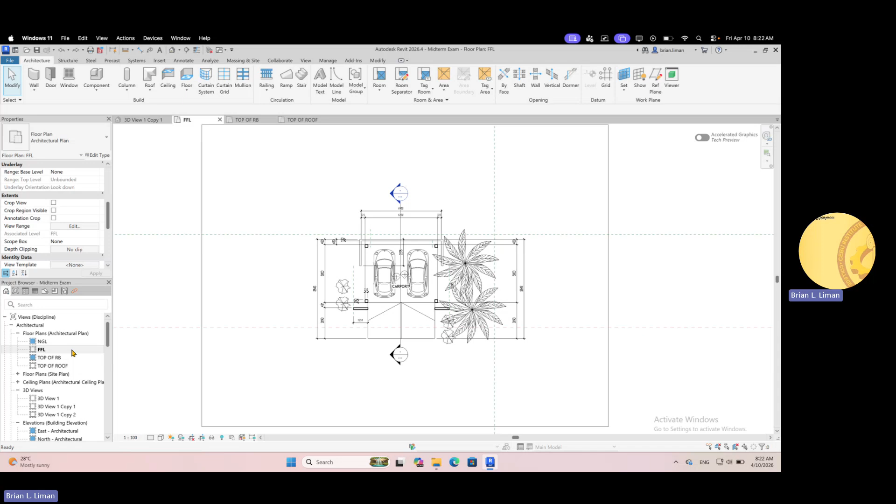This one class, you have to reflect the dimensions and label, of course, carport. Then this one class, as shown, you have an arrow reflected. That arrow is using detail lines, so you type DL to form this arrow. That signifies that the area is sloping, that surface.

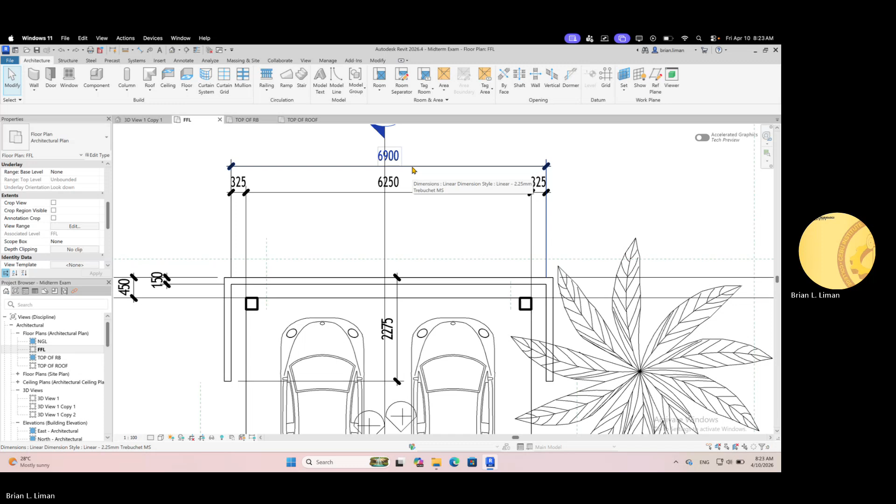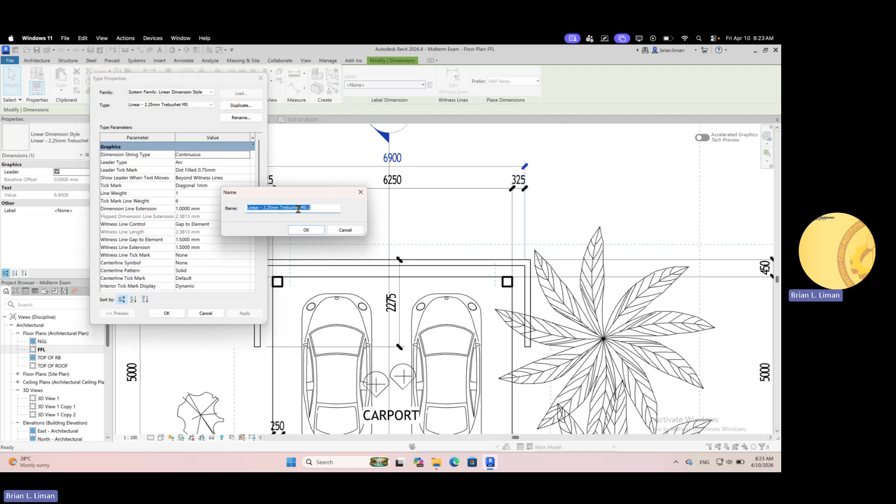As shown, the dimensions are in millimeters. If you want, you can set that to meters. For the dimensions, the reason is you have to make changes into the properties. You just click on the dimensions, edit type, then duplicate.

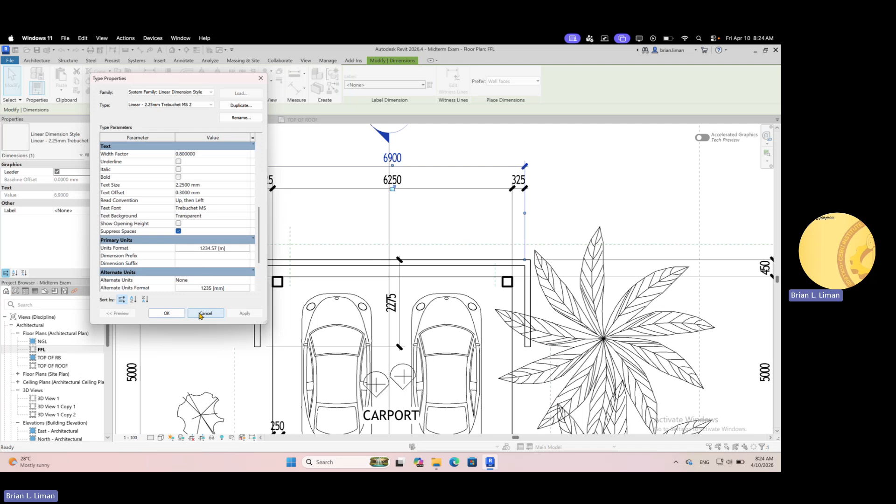Scroll below. Under primary units, go to units format, click on that, change to meters, set rounding to 2 decimal places, then okay, apply, then okay. As shown, this particular dimension is now in meters.

However, the others are still in the old unit. So what you do is click on the other dimensions, click on them, then go to type selector under properties, and set them to this one that was created in meters.

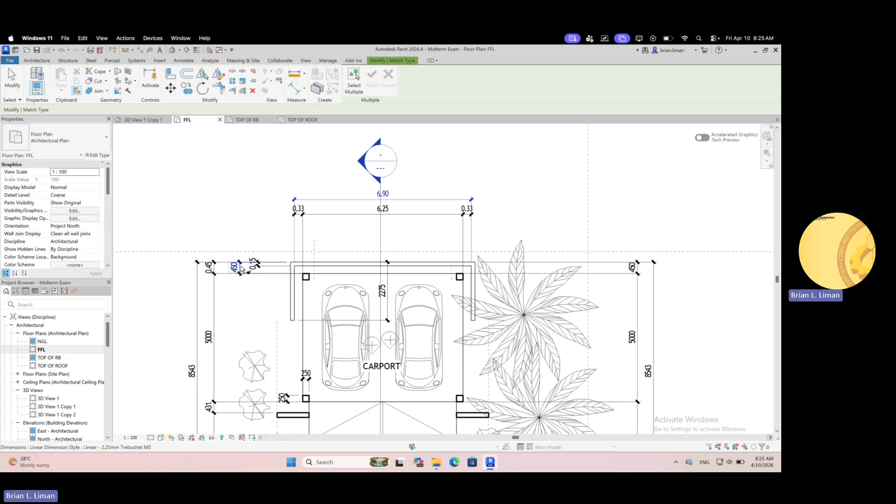Another method is MA, just like in AutoCAD MA, match properties. Click the source dimension, then click the destination dimensions. As shown, the one I clicked is now using meters.

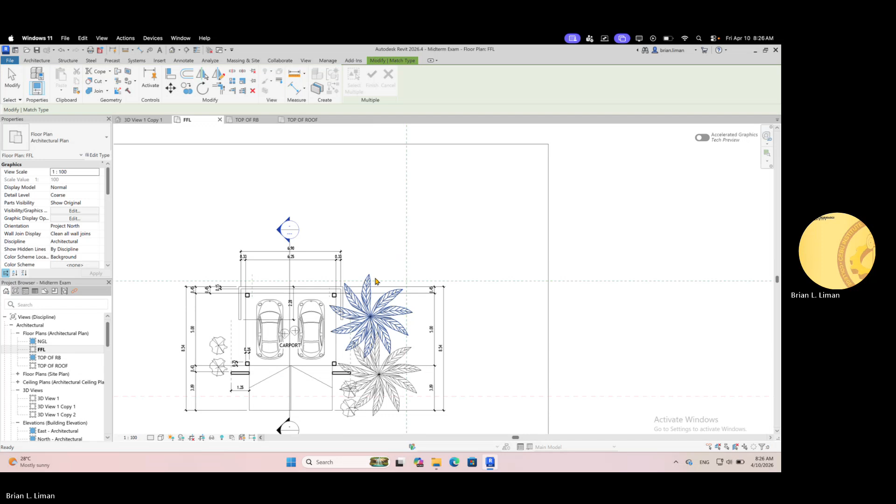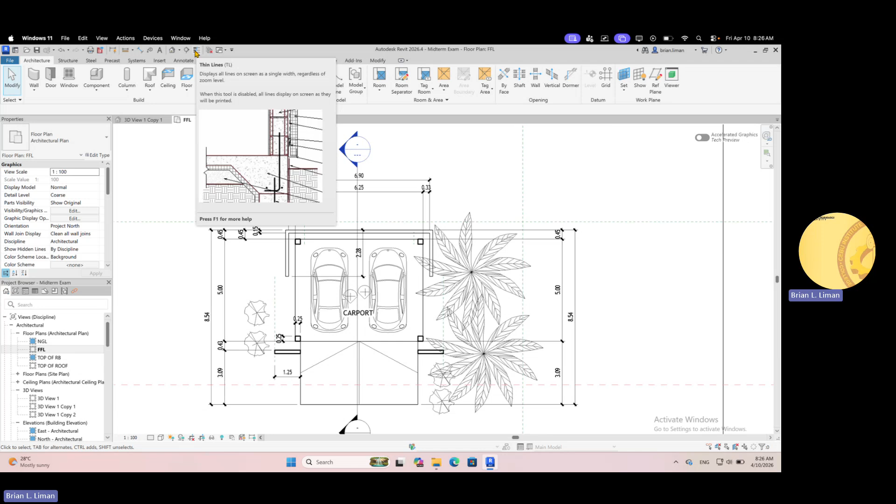Now, in terms of line weights, we can see some are thick and some are thin. If you want, while doing the model, everything to be thin lines, you go here, thin lines, you can also type TL. If we activate that, everything becomes thin. It will not apply thick lines. You have to click it again so that line weights will be applied.

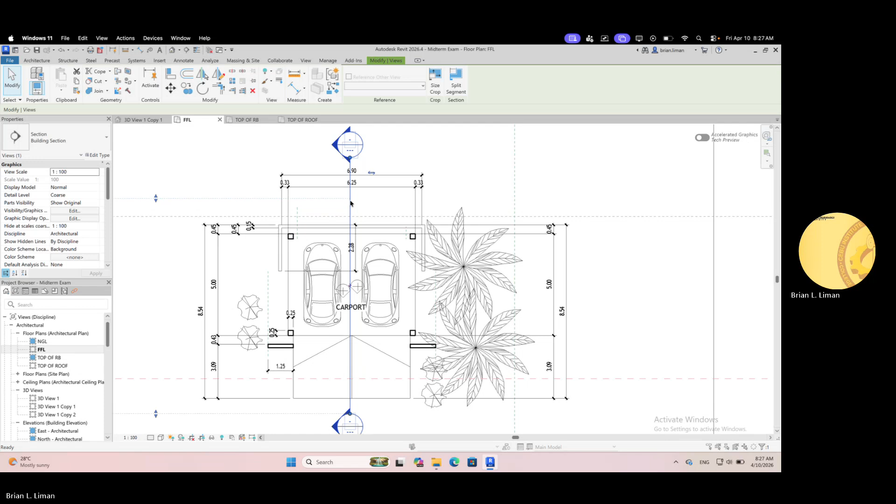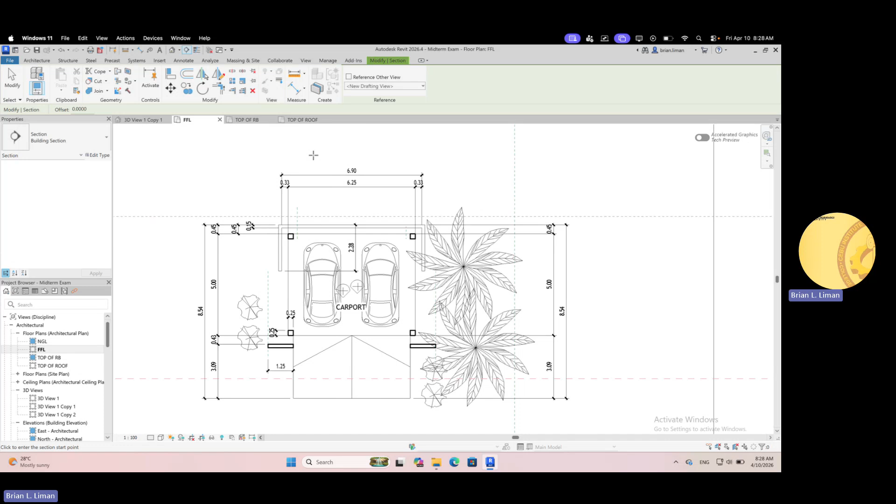Section - we already have a section placed. For the section, I'm going to delete this one. Section is here, this one. Upper part, you have section, you can also go to view, then here you have section. To be faster, just use this. Click section, go to your FFL, click section and the tool is activated.

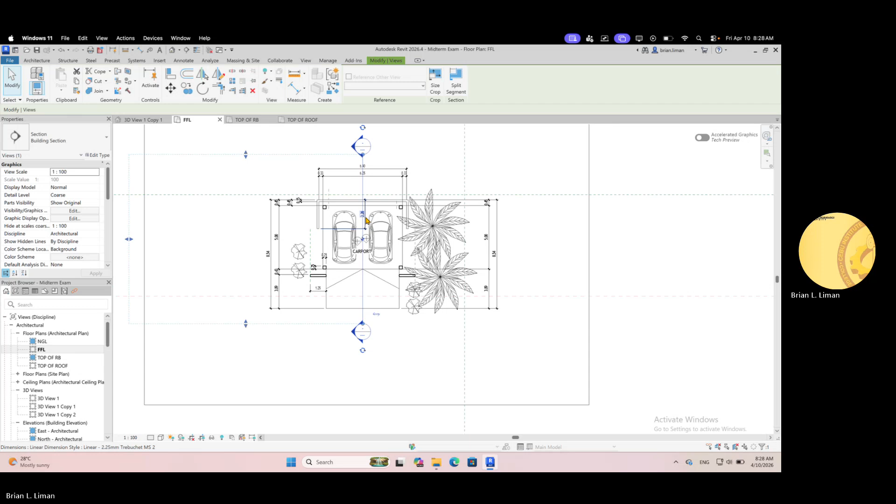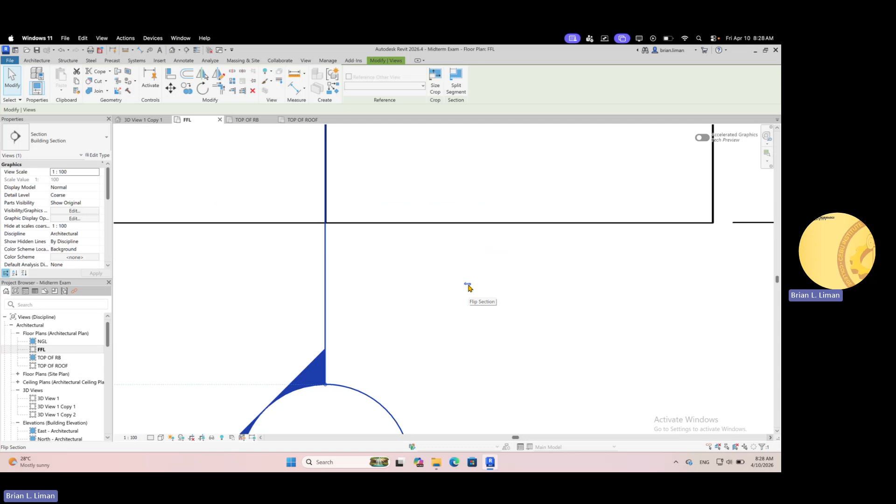Let's say you click here from bottom and hover upward, then also click for the other end. So that's the section being indicated. Now, the section, as you can see, has arrows here. If we click these arrows, it flips.

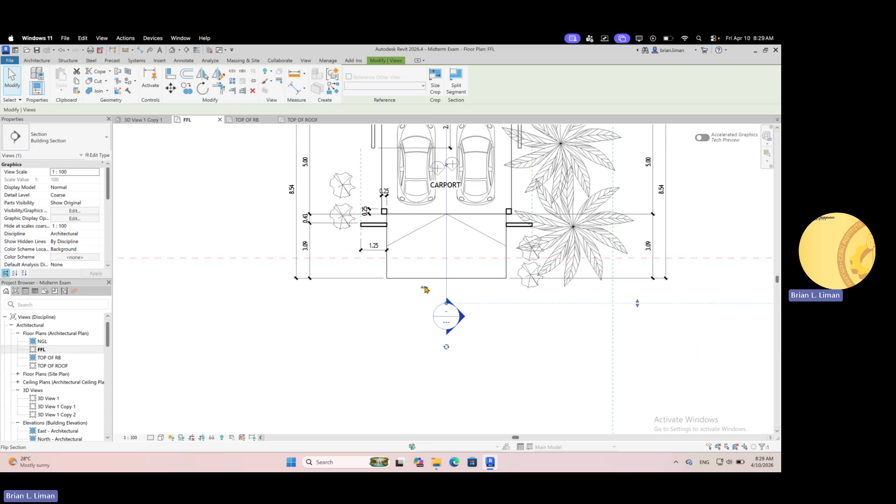That's the view, so it depends on us what to show. But this structure, there's no problem since it's the same either way, similar to flipping to the other side. Let's say we keep the arrow pointing this way, click that one again. So this means, when we cut this section, the view faces this direction. Another critical part of this section is this, which indicates its extent.

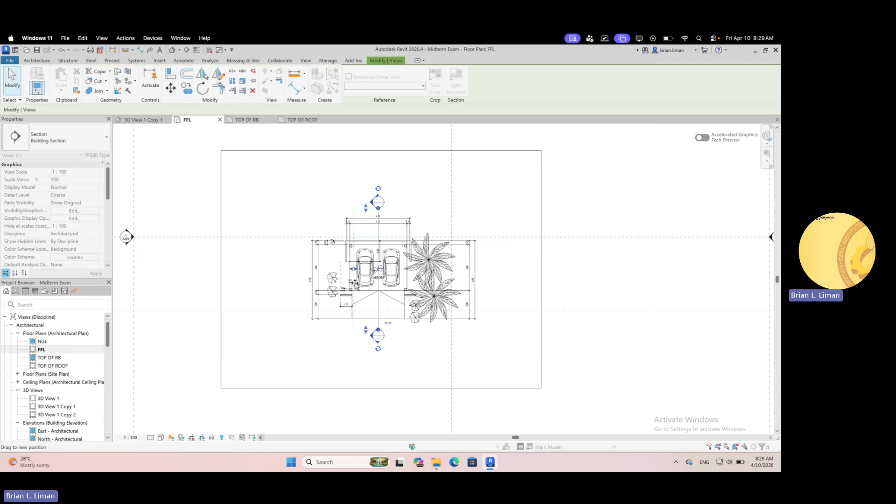This indicates its field of view, up to here. Let's say you move it, hold it, and place it here - that means its view is only up to here. It won't see the columns and this wall. That's why it's called the extension or extent of the site, so you can see through it if there are elements or structures you don't want to see in this particular section, you move it.

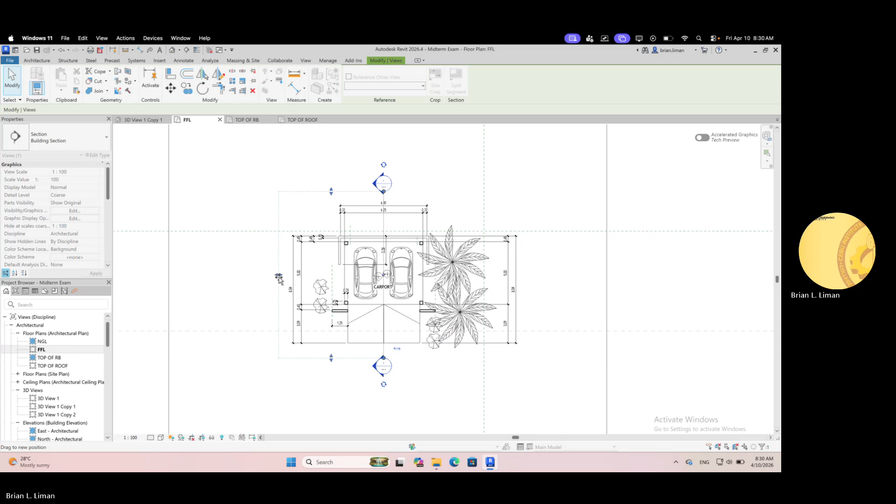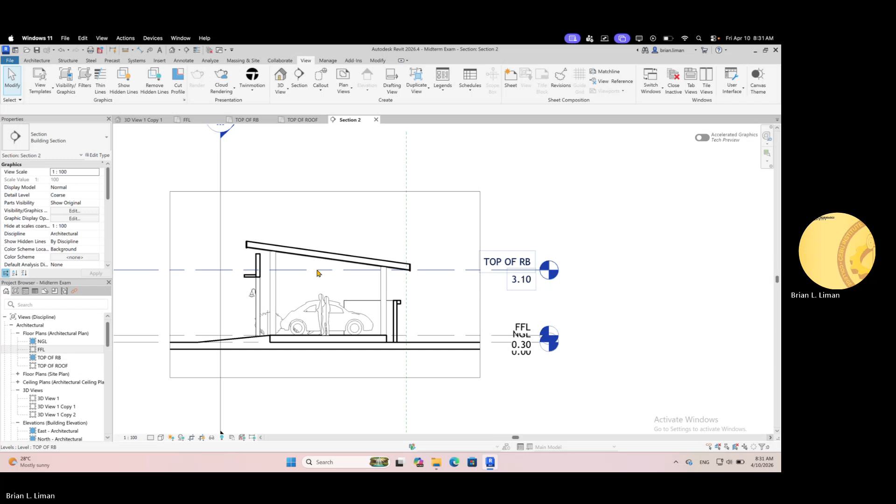So for the section, we click that section, right click, then go to view. Here, we can see its section view - this one. So you make the section and then go to this view of the section. It's the same with crop view, this one, you can control your crop view. Let's say you want to see this area, then hold on this point, and now only this part will be shown for our section view.

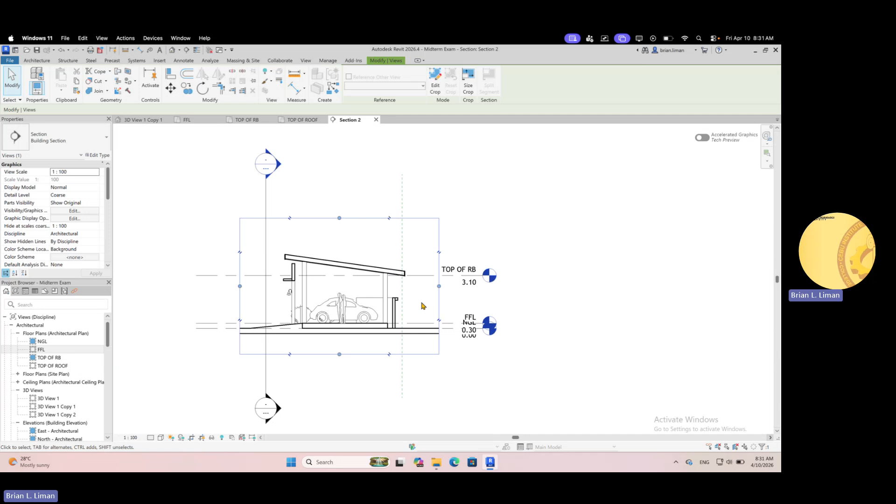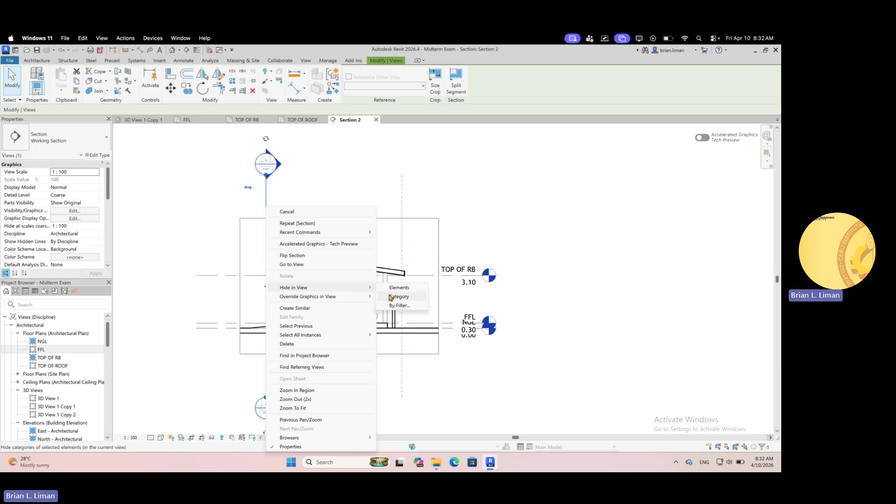Now, if this one appears, like the other items, section views you don't want shown, what you do is select it, right click, and hide in view elements. If there are multiple sections, you can use category so that all section annotations get hidden at once. But let's say elements only since there's just one, so hide it.

So we can see line weights are applied, thin. But in our section, we want to apply shading - example, the wall we make black, the roofing we make black, the flooring we make black. So what do we do for that?

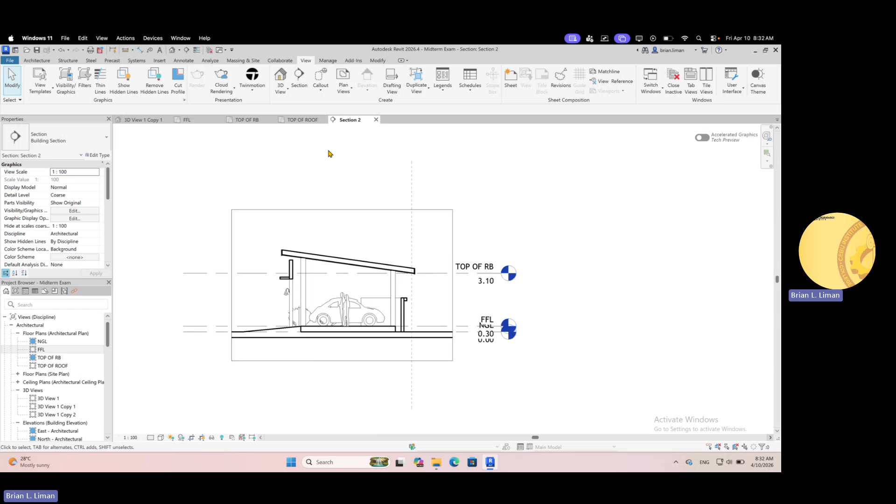You go to visibility graphics. Under view, you have visibility graphics, or just type VG. You can use VG or view, then visibility graphics. So what we'll do, class?

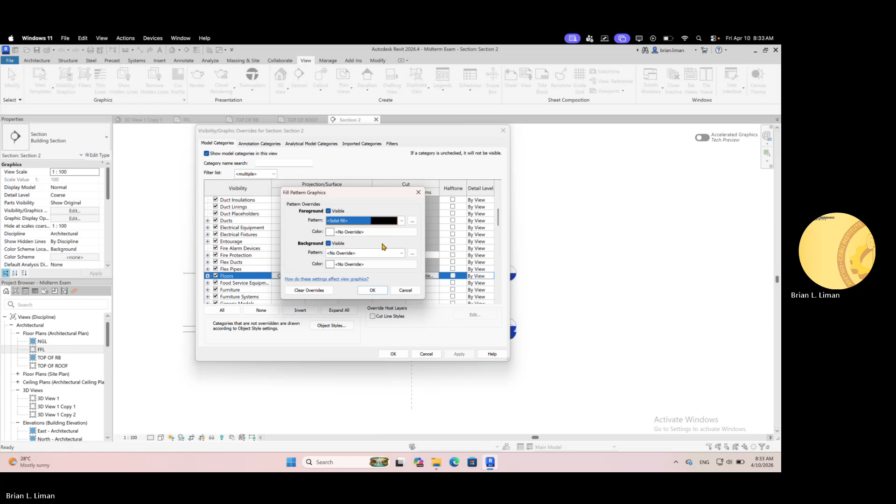Let's start first with the floor. Find floor, scroll. So here, floors, go to right side, under cut, under patterns, click on that, click that button, override. Set the pattern foreground to solid fill, set background pattern to solid fill, apply, okay, we'll check if it's applied. Now we can see it's applied, the shading.

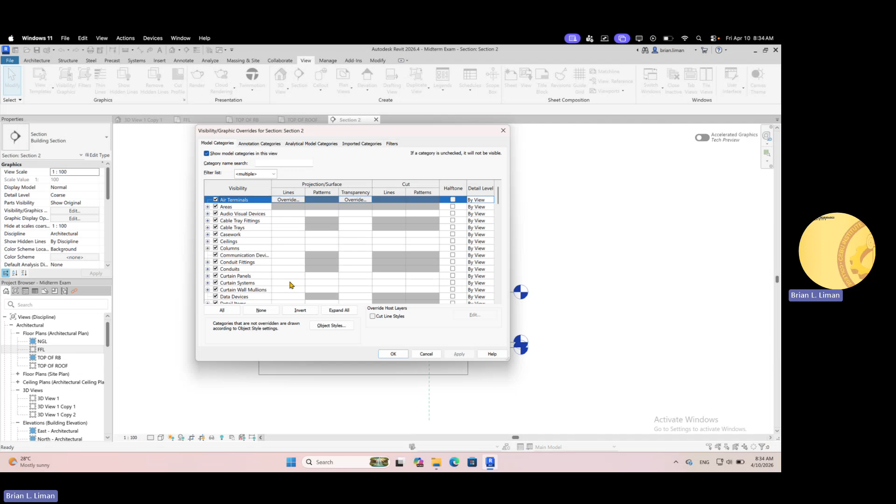Another item is about the wall. So let's go back. You can type VG. So you find the wall class, the wall.

Walls. Under cut. Under patterns, click override. Same steps. Under pattern, select solid fill. Then background, solid fill.

Okay, apply. Okay, so we'll check if shading is applied. As you can see, shading is applied.

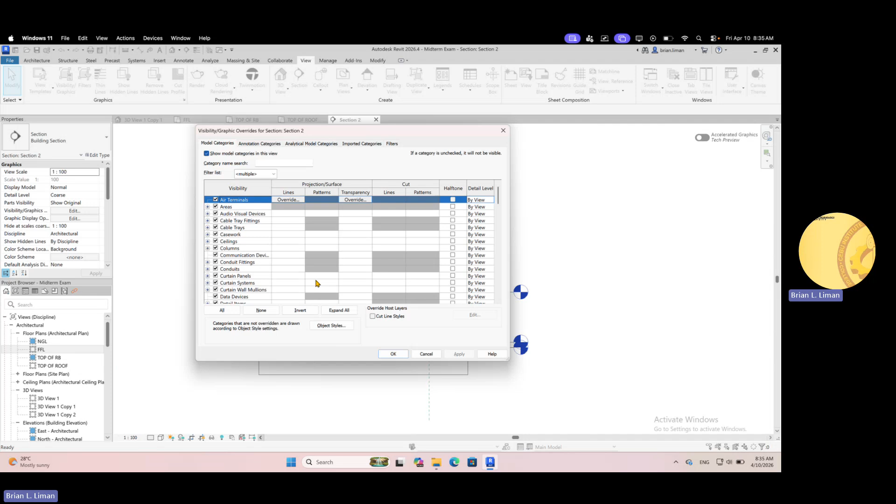So where do I find the roofing? You type VG, then you find roofing. So roofing, there is a class below.

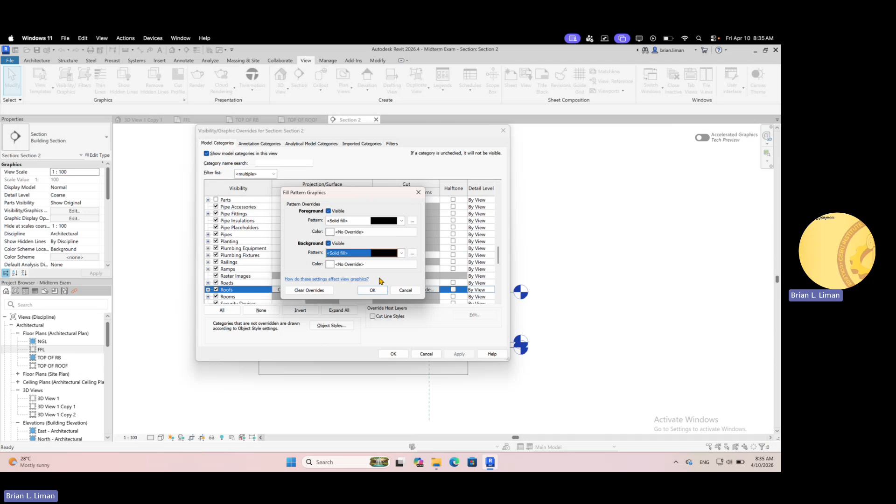Same process, override. Solid fill, select. Background, solid fill. For pattern, okay. Apply, then okay. So as shown, the roofing is shaded, as well as the wall and flooring.

Okay, now we choose solid fill for this one. Meaning, aside from solid fill, there are other choices there, like shading, hatching, diagonal lines. You could choose any of those, but we'll just pick solid fill to make it more emphasized.

Okay, then where is the scale? The scale class is here. Bottom part, again, the scale is at the bottom part.

Now, for example, instead of 1:100, if you want it bigger, you can choose 1:50. If you want 1:75, you go to custom, then you type 75, then okay.

Okay, our purpose is it will also depend on the report class. Do you see if it overlaps? The proportion in relation to the structure will matter, since there may be a time, if you look at the levels, where the presentation competes with the structure, where the text is too big, overwhelming the structure.

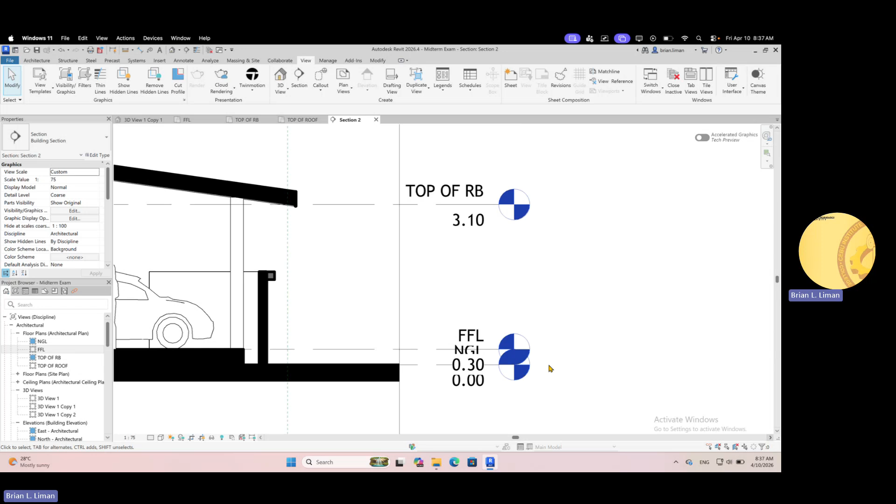Now, reviewing the class, if you have this setup wherein the levels are overlapping, that can be adjusted. How do you adjust it? You click the level, click that one, and then try to find, over on the level, that break line.

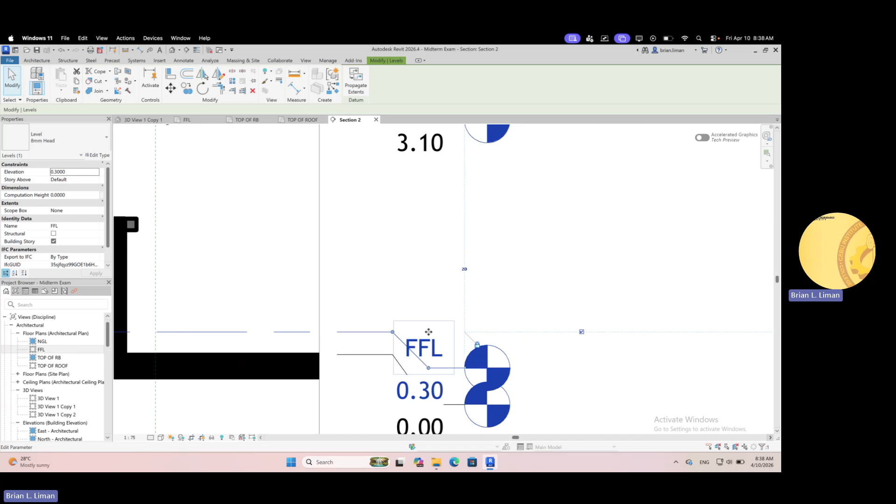What is that break line? A symbol like this will appear, the break line. So you add elbow, click on that, adjust this point, hold it. You can also adjust this one. Just click and find this break line, click on that to add elbow.

Okay, and of course, don't forget dimensions. DI, DI. Then set the dimension to use meters. Click the levels.

And then for the text, go to annotate. You go to annotate for text, then text tool, text class. Then here, choose no leader. Click here, then type carport.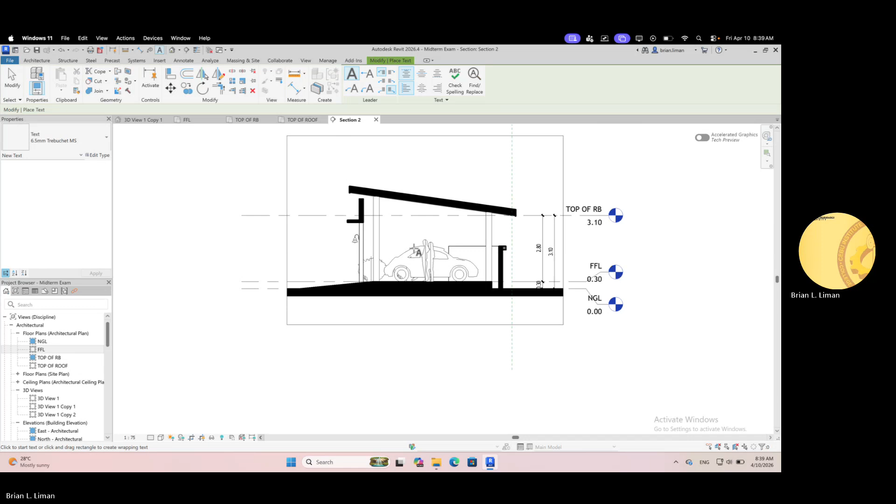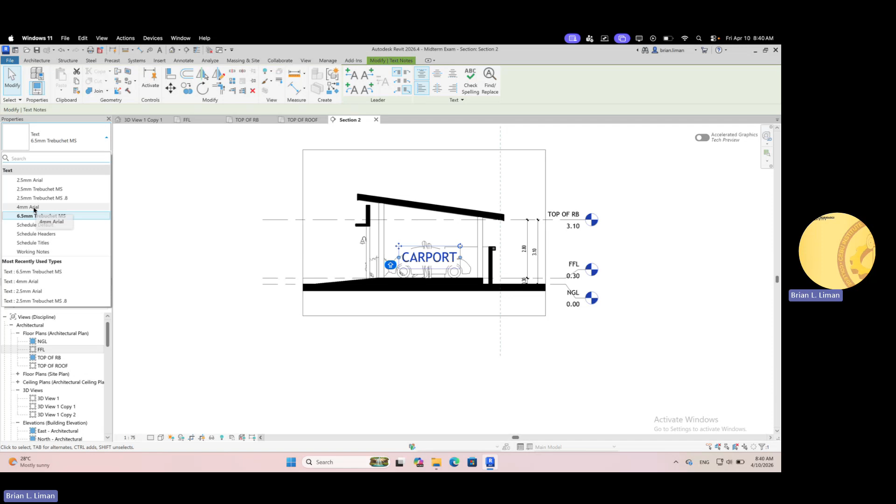Okay, if you find the text a little bigger, find it here. You go to type selector, make sure you select the text, then change that to a smaller size.

Okay, now this is the NGL. And then this is actually the ground, but for the ground we make use of the floor. You can use the floor class, floor tool, for the ground. Okay, or you can use that side too.

Now what happened, class, is it appeared shaded. And then in our section for earth, the presentation for earth is different, it's not shaded. So what you will do, class, is just click on that, then right click, and hide it.

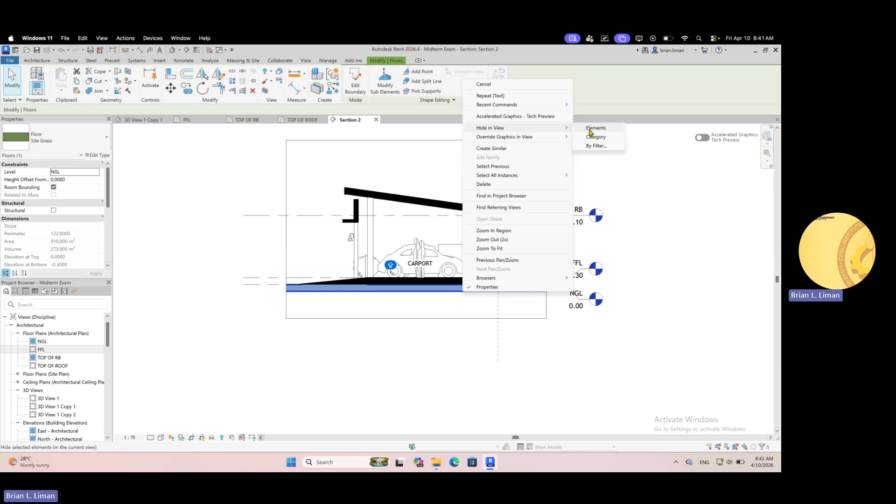Just elements, not category, so it won't hide the other floors. Click, so it's hidden now. This is one method, it's hidden, and what we'll see is it'll appear floating. That's why the ground disappeared for this view only, other views still have the floor.

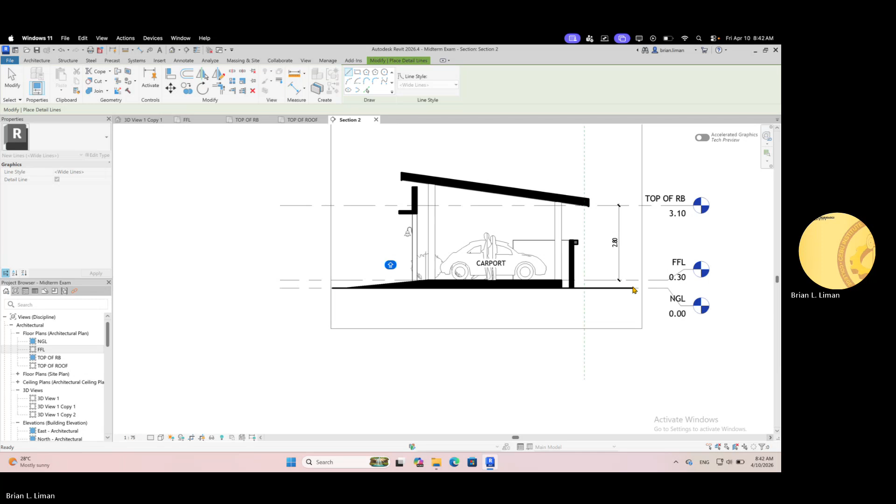So let's go to DL. Type DL, that's the line, it's thin by default. You go to wide lines, class, okay wide lines, to make it thick. For our NGL, we want it thick, wide lines is what we'll use. So once it becomes that line, this one, okay.

Next, we're going to put earth. So where do we go to make this earth? You go to annotate, then you go to region. You've done this before. This is the filled region, so click filled region, then select rectangle.

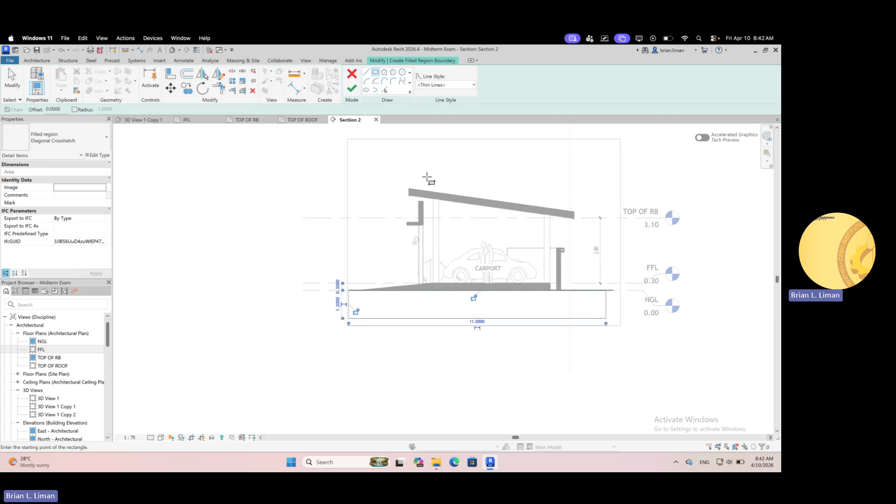Then you just draw, class, from here to here. Okay, then you go to properties. That's diagonal crosshatch, so that's okay. Just click.

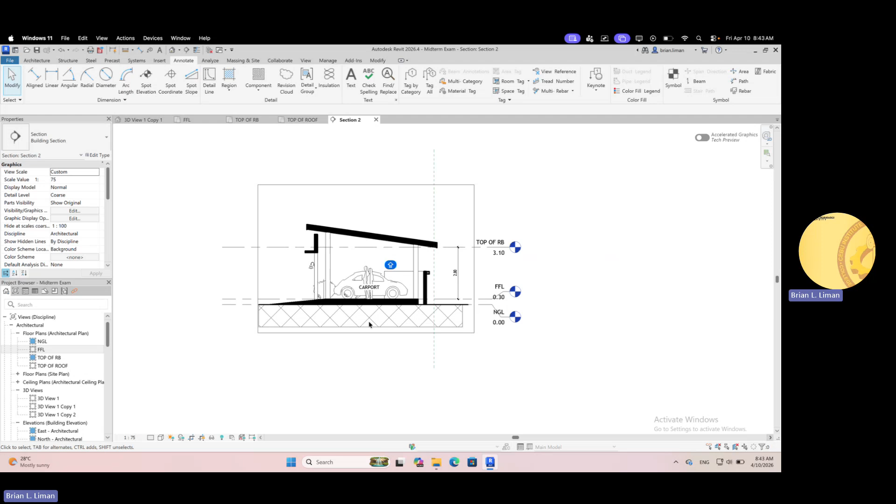Check, now as you can see, it's not representing the earth symbol. It's just hatching, all of it is hatching. So what you will do is just click on that, then edit type.

The usual, class, duplicate. Let's rename it to earth, then okay.

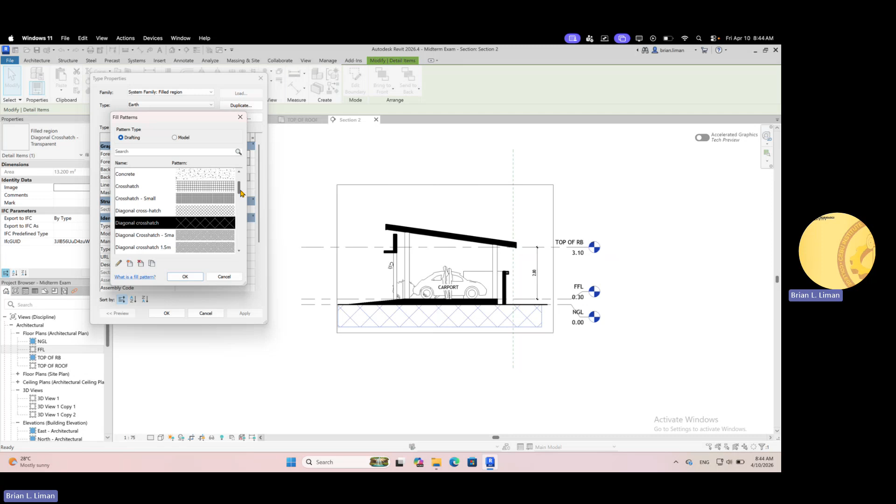Now, where is the pattern? What is the pattern, class? By default, it's using diagonal crosshatch. Just click on the 3 dots button, then you find earth, so this is earth. Apply, okay.

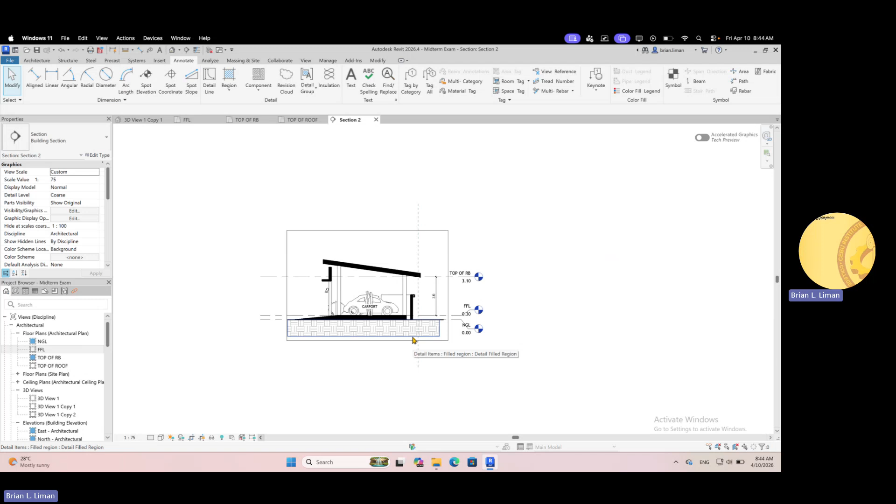Okay, so now it works. We are able to apply earth using the filled region. So earlier, you could actually retain that floor as ground, and just cover it with the filled region.